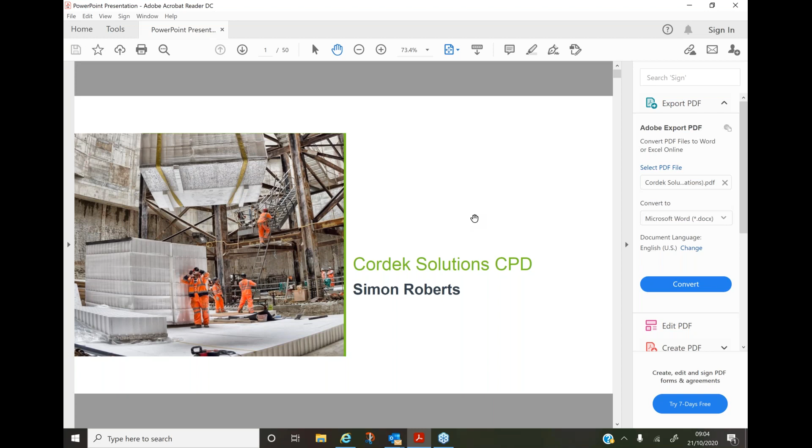Good morning, everybody, and welcome to the Cordek Solutions CPD. Thank you very much indeed, Jordan, for the introduction there. Okay, so today we're going to be looking at ground heave solutions, ground gas protection, and structural fill solutions. The CPD is really an overview of those three main areas that Cordek work with.

So Cordek as a manufacturer are predominantly involved in the construction industry. However, we do cover the sectors of leisure, marine, automotive, rail, highways and landscaping. And indeed, in any one of those sectors, you may come across the need to introduce a polystyrene product to form a solution or some gas protection measures.

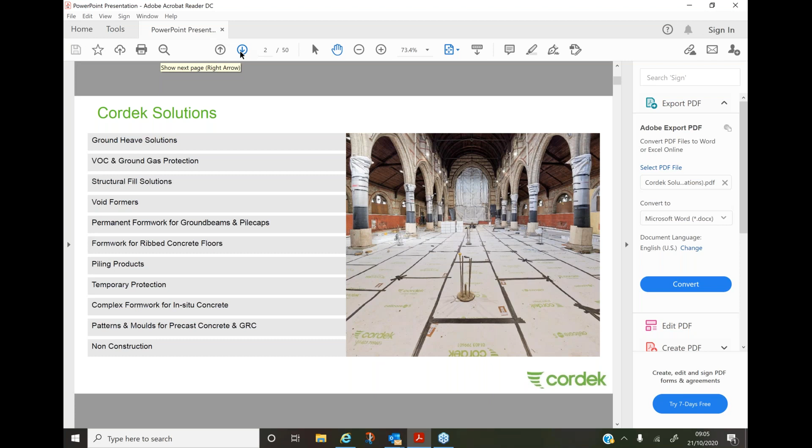That situation will also cause compression of surfaces underneath the footprint of the building, and heave can occur from three main areas, either as a result of a potential volume change from an expansive clay soil, or from reconstituted slag, which is a byproduct of the mining industry, or the freeze cycle. And the freeze cycle really is where we're looking at areas of permanently frozen strata that may thaw or freeze, and it's that thawing and freezing cycle that is replicating what a clay soil does when it expands under heave.

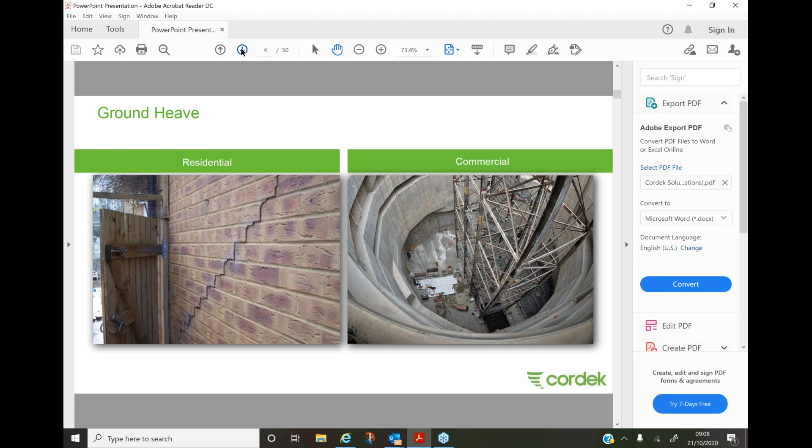Incorrect foundation depth can be remedied by consulting chapter 4.2, building in expansive clay soils, and selecting the correct foundation depth for your application.

Lack of heave protection is where you people very kindly specify our products, and the contractor or the project then deems that they don't want to actually put those products into the build.

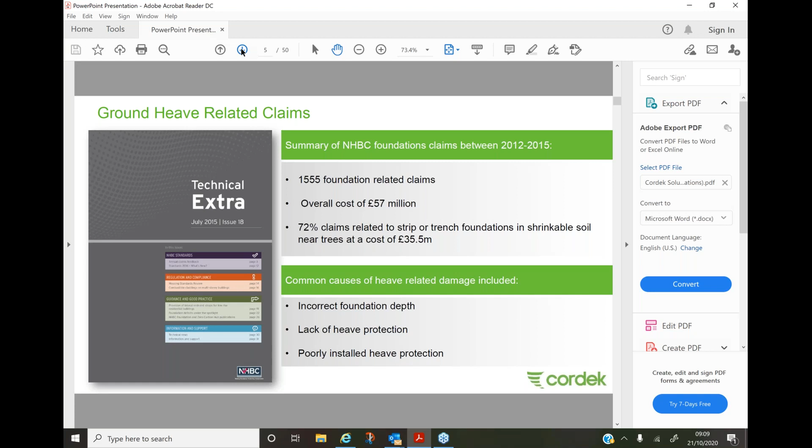Poorly installed heave protection is more where we can assist as a manufacturer, advising contractors, engineers and architects on the best method to install heave protection. That covers things like introducing a blinding layer or taping joints at formwork to stop the ingress of concrete slurry weeping down into the area where we're looking to procure a void.

So how do we know if we've got heave? Obviously we would undertake site investigation. That can be done by either a specialist geotechnical site investigation company, which may be a standalone company, or for some of the larger structural consultancies, an in-house operation, one of the services provided by those people.

We go to site and identify the soil strata, physically what is there, the characteristics of that soil, how it's likely to behave, and from that we get the plasticity index. We can also identify the heave potential, putting it into a low, medium, high, or extra high potential volume change.

It is the plasticity index that we consider when we are looking to specify the depth of a compressible polystyrene void former.

The other way of finding out if we've got heave, if we don't want a specialist geotechnical site investigation undertaken, we can refer to historical information. That can be provided either by the NHBC or the local building control, or simply by consulting the geology map of the UK and understanding where expansive clay soils occur.

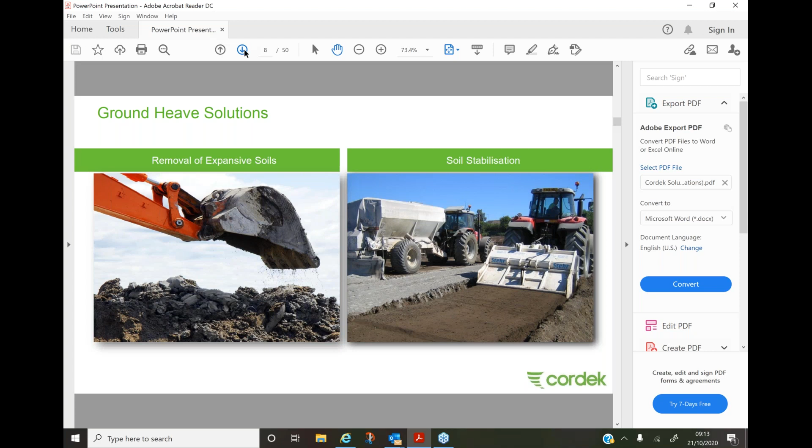We do, however, have to consider heave protection at the perimeter for any potential volume change higher than a low situation. So for a medium, high, or extra high situation, we would have to introduce lateral heave protection around the perimeter on the inside face of that particular perimeter foundation.

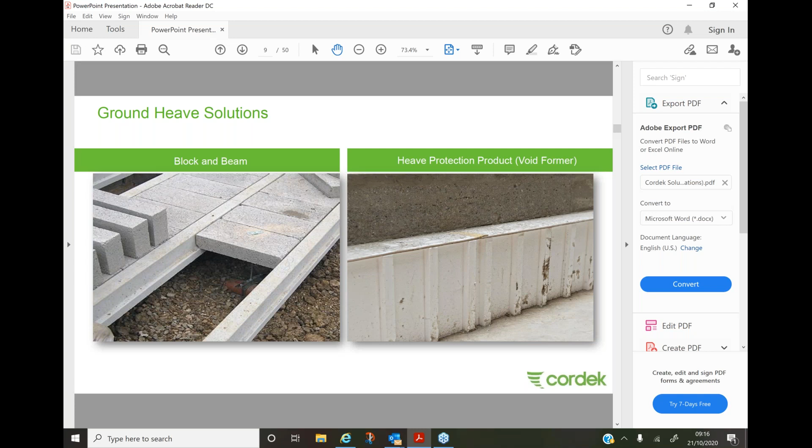So moving on to the actual Cordek solution, we have a range of products called Cellcore HX. These are a 4th generation product, 25 years in development, and they have full BBA certification. The Cellcore HX range is an umbrella term that covers 3 products within that range. We have HXS for slabs, we have HX Plus for providing heave protection and insulation under slabs, and we have HXB for beams and pile caps.

The product range itself will take you up to 900 millimeters head of concrete. That's physically how much concrete you can put on top of the actual product. If you want to protect concrete depths from 900 up to just under 2 meters head of concrete, then we would look at a different range, which is our Cellcore HG range.

Now the Cellcore HX range, the components of it are all pretty much the same. So you have a molded cellular leg with a range of different tops glued on top of those molded cellular legs. There are also drainage holes in the legs, which enables the product to be used in areas either where you have a high water table or in a coastal environment.

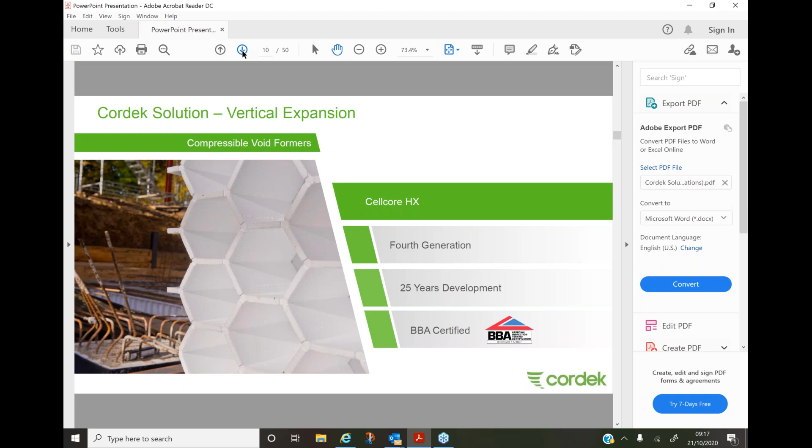So this one we can see here is our HXS product. It's a standard product for use under reinforced floor slabs. It comes in a 1.2 by 2.4 meter panel size and is made up of a collection of cellular legs, with a 10mm twin fluted polypropylene top, which is strong enough to actually walk on during placement of base spacers and reinforcement.

You can see there that the actual product is sited on a blinding layer. We do like to see the product sited on a blinding layer for various reasons. First of all, we want to start off with a flat level surface to minimize wastage of concrete pour above. Secondly, we like to alleviate the product coming into contact with large aggregate on the strata's surface, so hence the blinding layer, and compacted blinding as well, because we don't want the blinding layer to actually go up into the cells of the product and detract from its performance during heave.

So basically, we would introduce a 50mm blinding layer. You've got various options available. You can either have concrete, lean mix concrete, a sharp sand and cement dusting to form a crust. If it's an internal application, sharp sand. You can also use 10mm pea shingle.

However, building sand isn't suitable. Building sand is great when it's wet, it's nice and compacted. However, when it dries out, it becomes fluffy and will actually fill up the legs of the cells underneath the product.

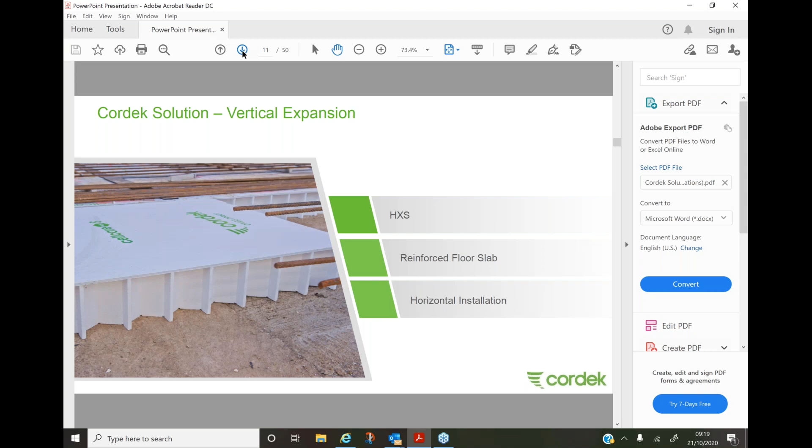So the HXS product is just a standard product. It provides no insulation value whatsoever for underneath the actual floor slab. If you are considering insulating your building, then you should consider looking at this product, which is Cellcore HX Plus.

So this is a combination product. It has a range of cellular legs with different depths of insulation glued onto the top of those cellular legs, dependent upon the target U value that you need to hit. And again, we have the protection board on top of it.

You can see that the operative in the picture is actually introducing formwork tape at the joints. That is to stop the ingress of concrete slurry weeping down between the panels and causing a dead spot. In this particular application, we had formwork tape, then the slab was poured, and then the damp-proof membrane was on top of the slab and underneath the screed.

Usually in most site applications, you'll find that you just roll out the DPM above those particular Cellcore panels and away you go. Either function will stop the ingress of concrete slurry weeping down in between the legs.

In terms of the U-value calculation service, we can offer you a U-value calculation service. It's a free of charge service, and we would ask certain questions.

So the area of the actual slab, the perimeter in linear meters, the target U-value that you would like your building or slab to achieve, the thickness of concrete poured on top, and the amount of potential heave. From that, we can specify a product for you. We put all of that into a U-value calculator, and it will outline the depth of insulation required to hit the target U-value.

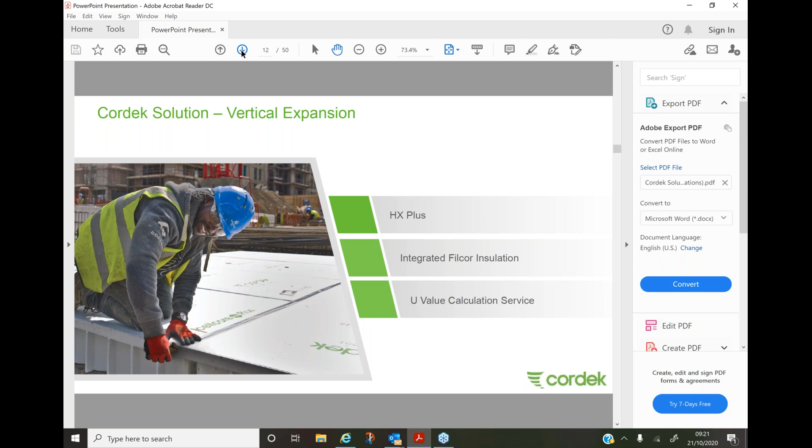The next product is a bit of a link here between what we are looking to introduce in terms of lateral heave protection, as well as our Cellcore product for protecting the beams and pile caps introduced on site. So what you see there is Cellcore HXB.

We manufacture that in a 2.4 meter length, and it's manufactured to beam width. That way we can ensure that the legs coincide with where the top of the formwork meets, and we don't experience any of the legs breaking off and the product overturning in the bottom of the trench.

It has a 5mm board on top of it rather than the 10mm board that I referred to earlier on for the HXS product. The reason for that is we're not actually anticipating anybody walking on the product during installation.

So the trench is excavated, we introduce our blinding layer, we then introduce our Cellcore, and on top of that we would then put our base spacers, side spacers, reinforcement cage, wire our formwork together, pour the concrete, backfill, and away we go.

HXB can be used for pile caps. What I would say though is if you have a close proximity of piles together, either 3 or 4 of these circular piles together, with a pile cap linking them all together, it might be considered quite a small space, and we might have site personnel trampling backwards and forwards over that small space, introducing quite onerous rebar.

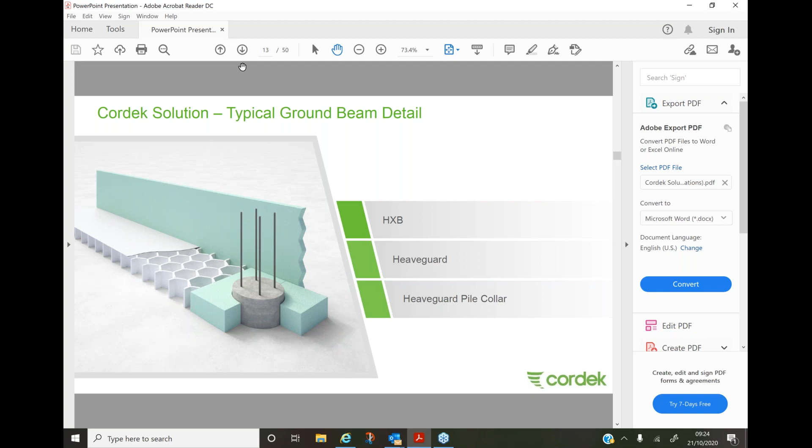As you can see, it's set up there. Obviously, there is no formwork. As I mentioned in one of the first slides, we do have a range of different formwork solutions that we can offer the contractor.

So what you see here is an example of our Cellform HX system. We have a U-shaped profile, an 8mm plastic formwork that is glued on top of our run of Cellcore, which is our HXB. Again, a 2.4 meter run, cut and manufactured to beam width.

So the idea behind this Cellform HX system is that it is a complete system.

It comes with straight line connectors, form braces, corner pieces, external corner pieces, infill panels, Heaveguard, and pile collars. So when your contractor has a set of drawings with accurate site dimensions, we can manufacture our Cellform system to fit those drawings. So when it goes to site, it's like a big boy's jigsaw - put it all together, put it in the trench, and there's no on-site fabrication required.

If your contractor doesn't want to choose this particular system, but would like to just introduce the Cellcore down below and perhaps use loose sheets at the side, we can also offer the actual formwork loose, sold in conjunction with formwork tape, just to take those joints down the side and stop the ingress of slurry weeping down into the area where we're looking to procure the void.

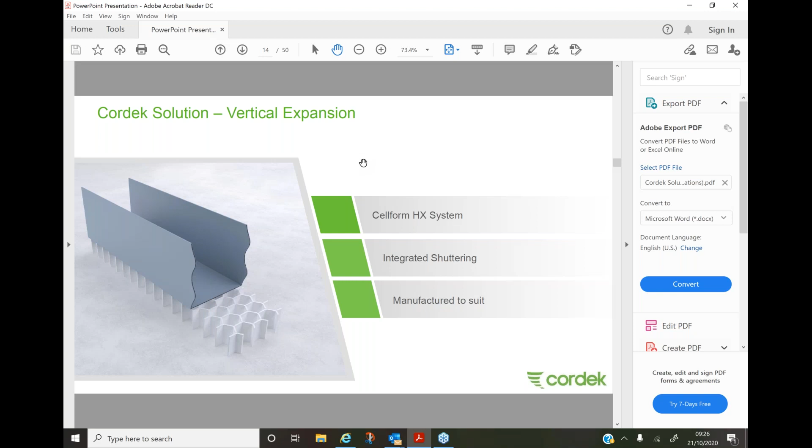So we predominantly have the plastic 8mm formwork. We also can offer the steel formwork, similar to the Pecafil type of product, which is our steel frame with polythene wrapped over the top of it. So there is a range of formwork available to you.

Just going to look at a little bit now on specifying the actual product itself. It is a very simple product to specify. We only really consider two things: the actual depth of product, in line with the amount of anticipated heave, and the grade of product, in line with how much concrete we're putting on top of it.

So if we think back to our site investigation, we've got our plasticity index there. We've also got the potential for the product to heave - low, medium or high. We can then see our void dimensions required here, and these are the various depths of products we would introduce underneath either our slabs or our beams.

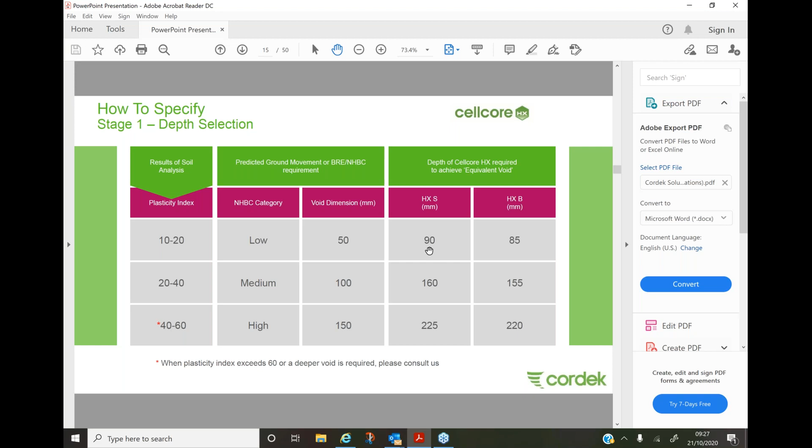So if you look at this one here for a low potential volume change, if you were putting it under a beam, we would have an 80mm leg with a 5mm top. Under a slab, an 80mm leg with a 10mm top.

In terms of selection of grades, it's all determined by the amount of concrete that we're anticipating putting on top of the actual product. So each grade has a color code, and those color codes are put on the product when it goes out to site, so the contractor is able to select and easily find which grade goes in which area.

So if he's got a slab that's up to 220 millimeters, he's going to put everything red underneath that slab. If his beams are up to, let's say, 450 millimeters, everything yellow is going to go under his beams. So it does make life a bit easier for him.

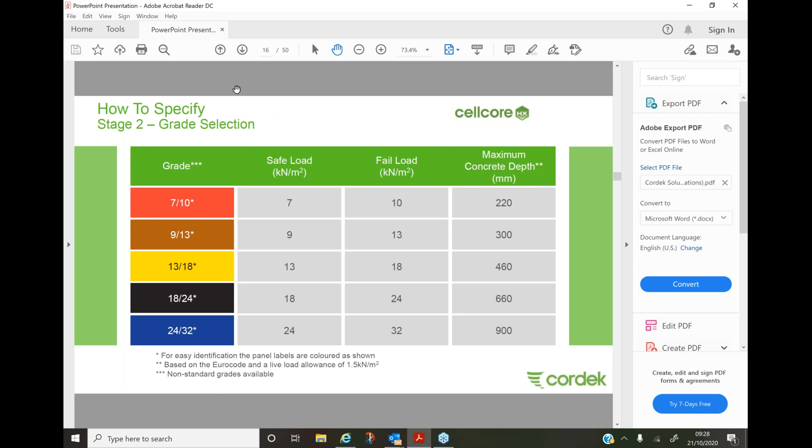Each product has a safe load and a failure load. So in the example of this one here, Cellcore 710 grade, it has a safe load of 7 kilonewtons per square meter - so it will support 7 kilonewtons per square meter. It's fully failed or compressed at 10 kilonewtons per square meter of upward force, and the maximum concrete depth is 220 millimeters.

As I'm moving through all of this, all of the facts and figures you're seeing in this presentation are actually outlined on the website. So if there's anything you're unsure about, go on there, select your product, select your data sheet - this information will be contained within those data sheets.

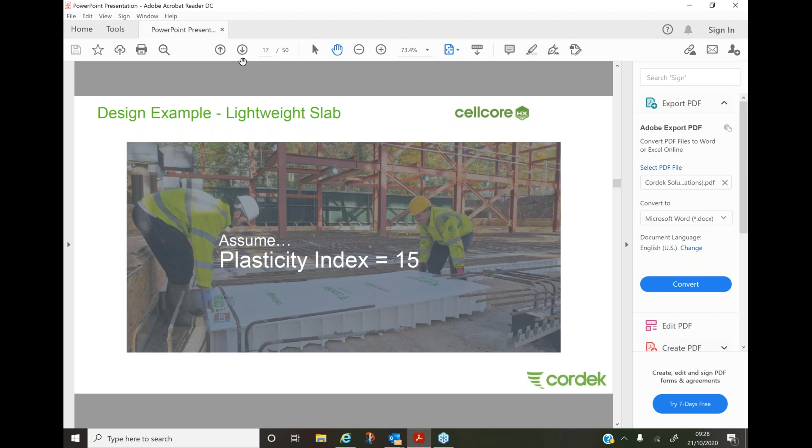So this is just a design example for a lightweight slab. Basically we've had our site investigation, we've identified that we've got a low potential volume soil, plasticity index of 15. So in our selector table, that's coming in there. You can see in between 10 and 20, we've got a 15 on the plasticity index, low potential volume change, 50 millimeter void required.

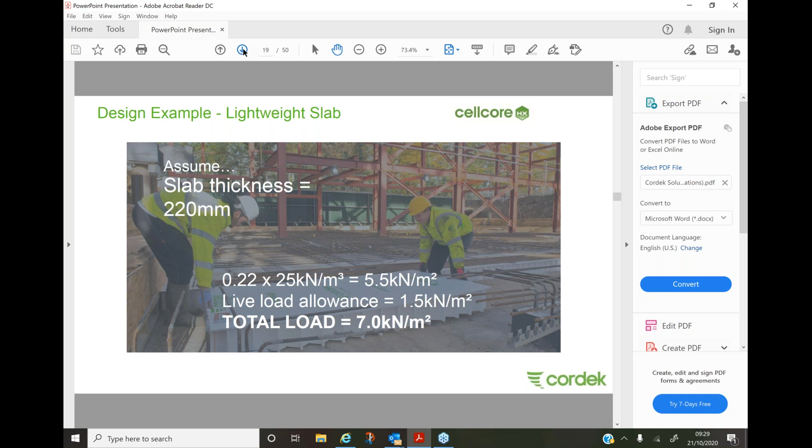So therefore, under the slab, 90 millimeter HXS for slabs. So we would do our little engineering calculation there to determine our total load that's going to be put on the product. So we've got that coming out at 7 kilonewtons per square meter, and that enables us then to actually select our particular grade.

So for up to 220 millimeters head of concrete, grade 710. So with everything, we have a full specification at the end of it. Cellcore tells us what the product is, 90 millimeter gives us the depth, so we know it's for a low potential volume change. HX gives us the range, S denotes it's for slabs, and 710 is the grade - so our safe working load of 7 kilonewtons per square meter, fully failed at 10 kilonewtons per square meter of upward force.

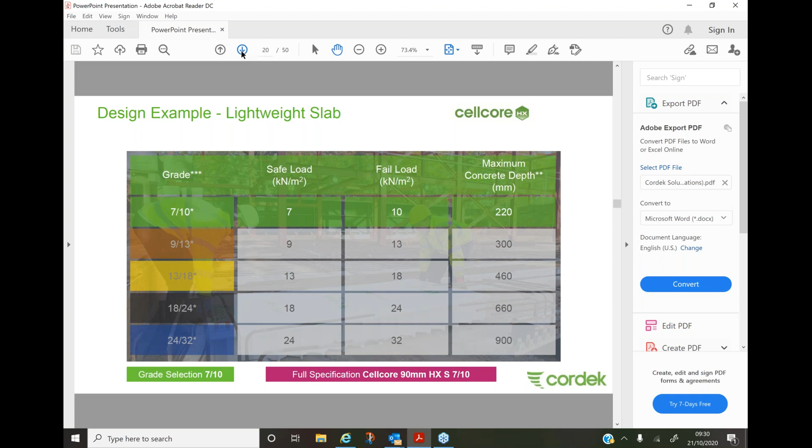That concludes the section on ground movement. We're now going to move on to VOC and ground gases.

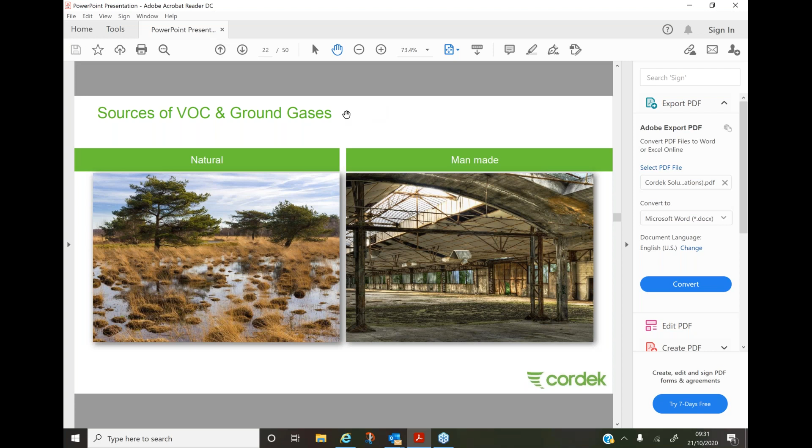So they are very real contaminants and gases that should be considered in a build, where we need to protect the occupants of that building from them ingressing into the habitable space within that building.

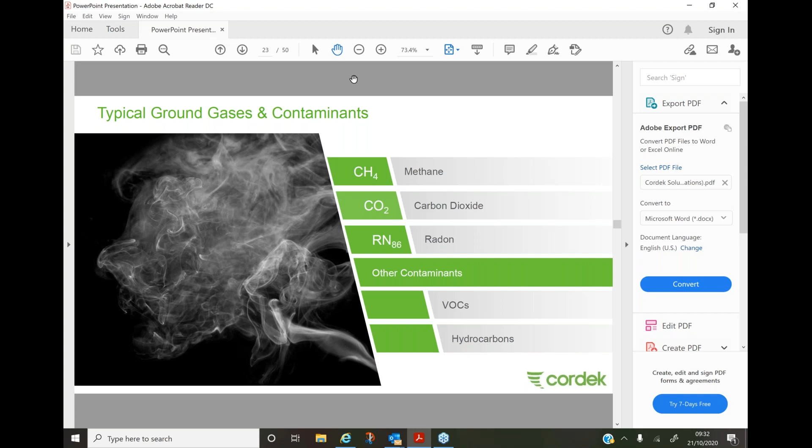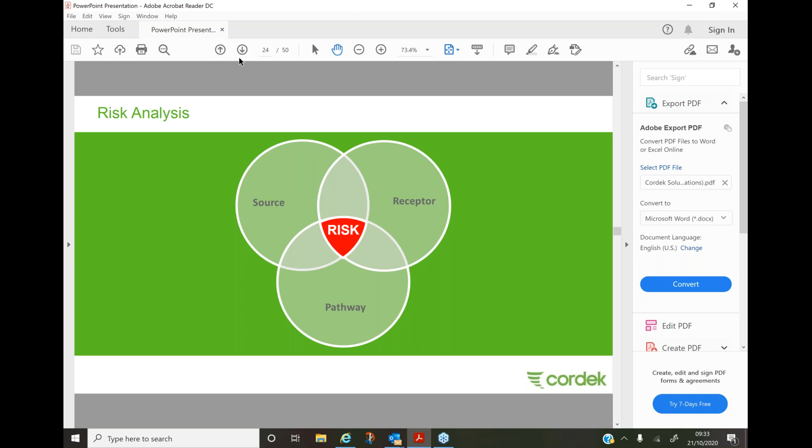If we think back to our expansive clay soil, we undertook a site investigation for that application, and similar things are undertaken for a contaminated land area. For example, we would go to site and introduce a range of boreholes, usually six over the area of the site, installed over a period of time designed to cover various different seasons and weather activity.

From that, we can establish what is physically there on that site, the concentration of what is there, and the flow rates in litres per hour coming out of the ground. From that, a gas screening value calculation is done, which puts the site into a level of severity - 1 being the least severe and 6 being the most severe.

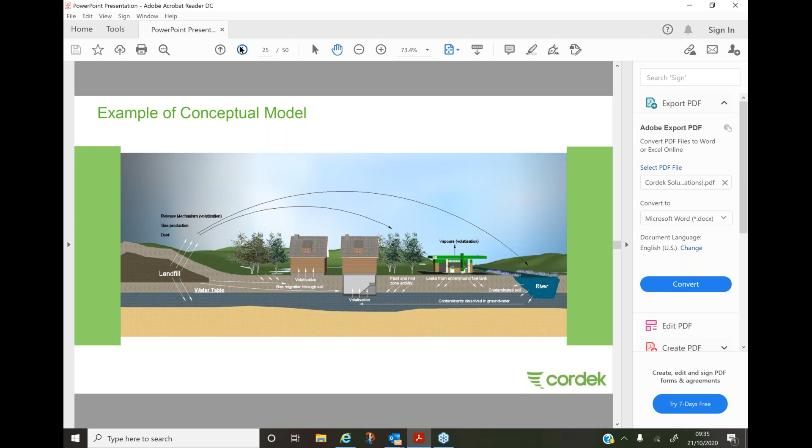That does have plus and minus points. You can certainly, if it's a residential application, be quite safe cutting your grass and growing flowers. You might not be so safe if you're actually going to grow produce in your back garden and then eat that produce, so it does have its limitations. It's usually to a depth of about 600 millimeters that is removed and then re-imported.

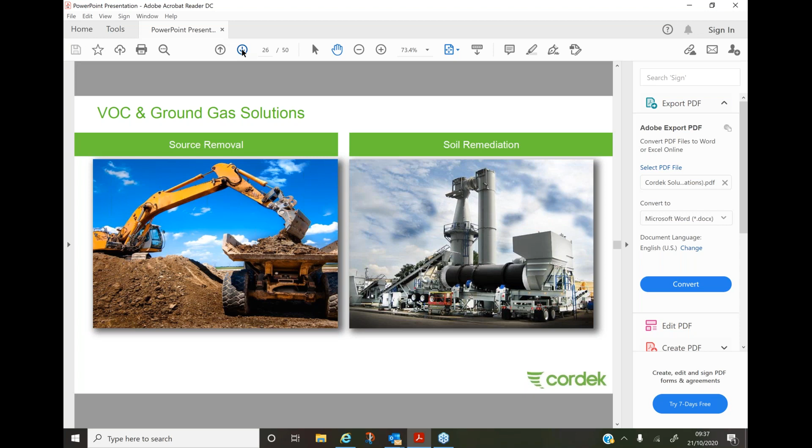In terms of the Olympic Park down at Stratford, when the Olympics were going on, all three methods that we see were used in that particular project - source removal, soil remediation, and also the pathway intervention method.

What we can see here is our Ventform system, and there are three main components to the system. If we look initially at the vent form panels, these panels are sited underneath the actual soffit of the slab, and underneath the panel there is a void that is maintained and kept open. The idea is that the contaminant migrates up through the strata below into this area underneath the slab, and is diluted and dispersed by tidal air out of the building, out to atmosphere.

What we're looking for in terms of guidance is one complete volume change of air every 24 hours underneath the footprint of the building, and where practicable we should be ventilating to atmosphere on all four sides. Where that isn't practicable, if we can just ventilate on the two longest sides and introduce a cross-flow situation. So those are the vent form panels, and we'll come on to have a look at those later on.

The second part of the system would be a membrane installed above the top of the vent form panels. In terms of guidance, the membrane should be a continuous impermeable layer extending over the entire footprint of the building, going across the cavity and terminating at the external leaf, where it can be trimmed and visually inspected.

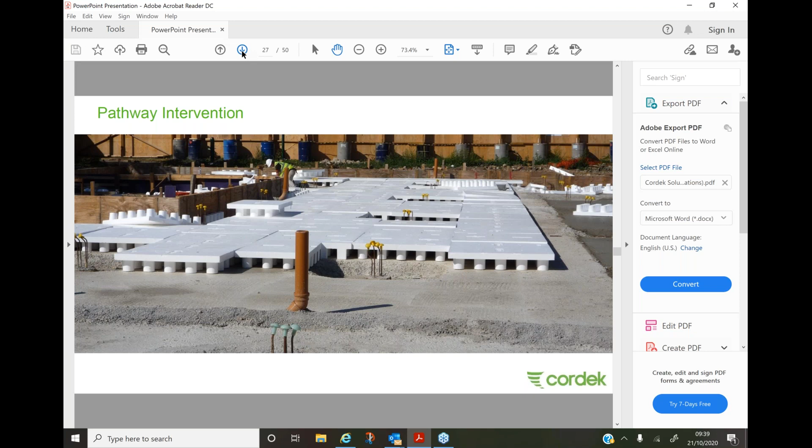There are industry guidance documents, supporting documents - they're all good bedtime reading. They're quite contaminant specific. Some of them are quite new and up to date and are being constantly changed. BRE report 211, for example, is a good one. The DOE Partners in Technology Guide is quite an old one.

It considers ventilating mediums for under a slab, using a metre wide strip. That's how the information was gathered for that particular criteria in ventilating under the slab, whereas what we're doing now is actually ventilating underneath the entire footprint of the building - a complete slab ventilation. So good bedtime reading, good documents, some of them not quite up to date.

The main two documents that people refer to are either the NHBC report or BS 8485, Code of Practice for the design protection measures for methane and carbon dioxide ground gases for new buildings. So those are the main two.

The NHBC document works on a traffic light system. Green means no guidance, no protection required. Amber 1 would be considered a low level risk, so the introduction of a membrane with a void underneath your slab. Amber 2, elevated level of risk, again void and membrane. Red - if you had a red zone, you should consider having your building actively ventilated rather than passively ventilated.

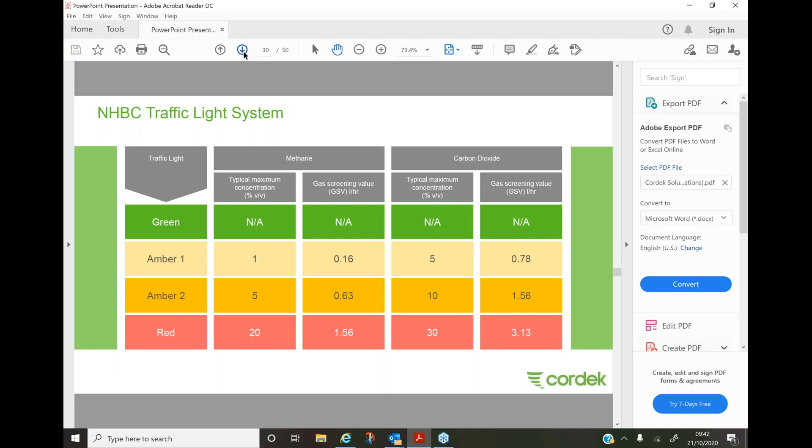For everything else, for all other types of building, there is BS 8485. That will cover all your types of buildings, from commercial, public, through to an individual house, for example. Those building types are split out from A to D. There is another presentation which goes into more depth than this one, which will outline the different types of buildings and what these letters from A to D actually mean.

Simplistically though, you remember our characteristic gas situation from 1 to 6, 1 being the least severe and 6 being the most severe. Each building type for each particular characteristic gas situation has to achieve a point score. So, for example, a building type B in a CS2 would need to achieve 3.5 points for it to be adequately signed off as protected.

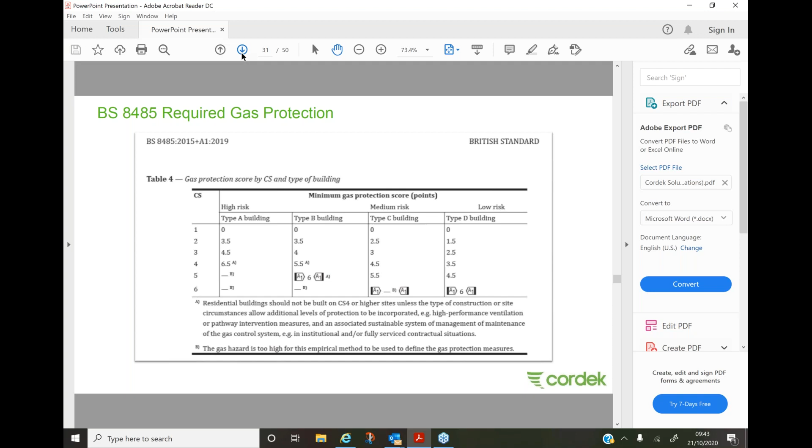So 3 main elements to this. First of all, there's the structural barrier, which will score you from 0 to 2.5 points, depending on how you build it. Then there is the ventilation protection measure underneath that structural barrier, scoring from 0.5 point to 4 points. Our vent form will give you 1.5 points and be deemed as good under the guidance, or 2 points and be deemed as very good. And then lastly, there is the introduction of the gas membrane or hydrocarbon barrier, scoring 2 points.

There has been a change from the 2007 edition of 8485. If you do have any old copies kicking about, it will tell you that your gas membrane or your hydrocarbon barrier will score from 0.5 point to 2 points. That has now gone over to 2 points. So all membranes, 2 points.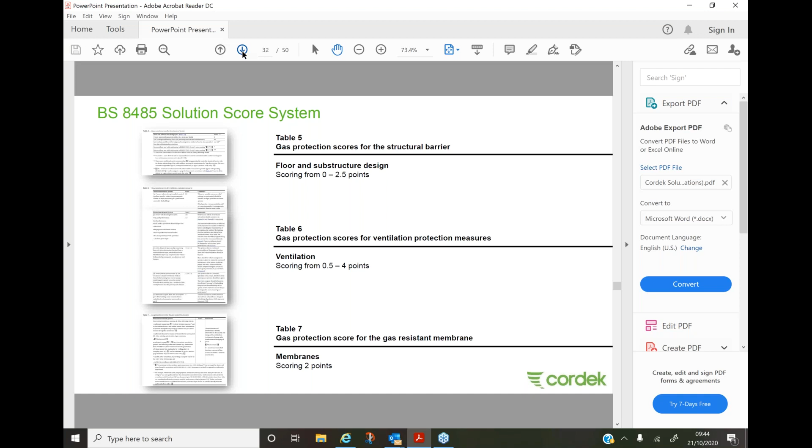The venting components themselves, we have 2 different types for passive gas ventilation. So we have a Ventform square-legged panel that can be either 80 mil or 100 mil in depth, and will take you from 20 kilonewtons to 50 kilonewtons load that the panel will take. It can be used for either a suspended slab or a ground bearing slab. The Ventform cylindrical legged panel on the right hand side there, that is 150 millimeters or 200 millimeters deep, and it will take 9 or 13 kilonewtons load, and it is for use with a suspended slab only. Both panels are molded panels, and they are 1.2 by 1.2 meters in size.

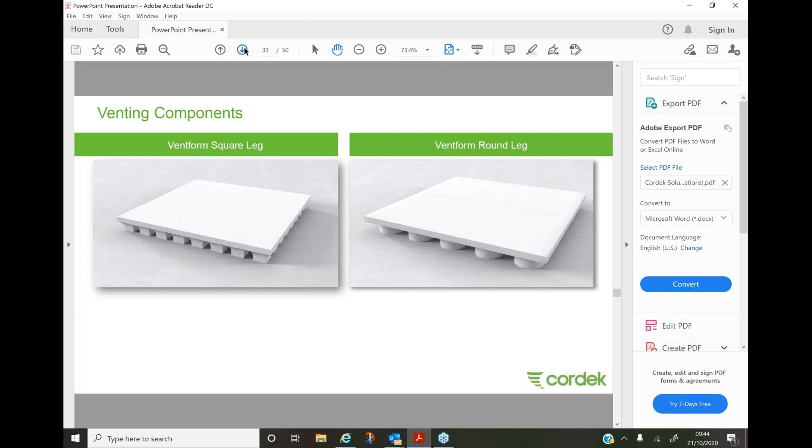If you wanted to ventilate and also guard against heave, we have this product here, which is called Cellvent HX. It's a combination product. It reverts back to the old model size of 1.2 by 2.4 meters. We have the collection of molded cellular legs at the bottom here, which replicates what our Cellcore product is doing in terms of protecting against heave. We then have a primary board on the top here with holes in it.

So that enables the contaminant to move up from the void below into this area here, which is our maintained void that is kept open, and that is replicating what vent form 8020 will do in terms of dilution and dispersal out to atmosphere. Then we have the top board, which is a 10 millimeter board, nice and strong for you to walk on when you're actually setting out. If you wanted a larger void here, if you had higher concentrations of gases and contaminants you wanted to get rid of, we can actually manufacture that.

The reason this product has come about is really changes in guidance. So if you have an area where you have an expansive clay soil and gas, and you are looking to actually protect your building, the Cellcore product under heave will compress, and you will have a void that is formed full of spalled material and compressed polystyrene legs. In other areas where heave hasn't occurred, the legs remain upright, and the drainage holes, which are sited at the top of these legs here, provide your cross-flow ventilation. In that scenario, it is simply not enough just to have this layer here. We have to have this maintained open void above it, and hence we've developed this Cellvent HX product.

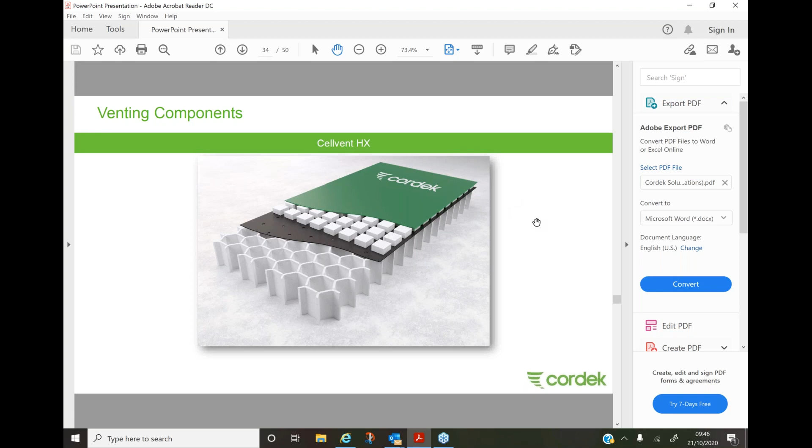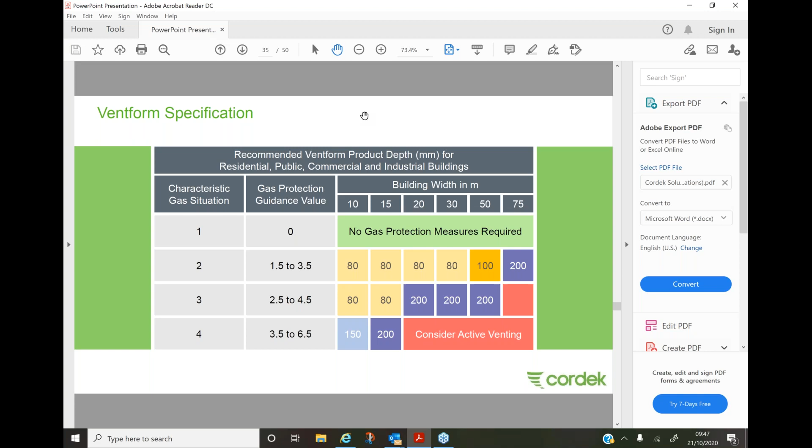That gives you an idea of the characteristic gas situations from 1 to 4 and how applicable our Ventform system would be to those particular CS situations. Obviously, it has its limitations. If you have a CS4 and you have a building which is 15 meters long on its longest side, that really is your limit for introducing vent form as a passive gas ventilation system underneath the footprint of that slab. Anything larger than that, really you should consider actively ventilating that particular footprint of building. But you can see there your characteristic situation, gas protection guidance value, and the depth of product that we would actually introduce there.

For ventilating to atmosphere, there are various different mediums. 9 times out of 10, if we have the conventional envelope setup, so blockwork inner, brickwork outer, we use air bricks with a periscope vent at 2 meter centers. If you can't get it in the wall, we can get it in the floor with either a rectangular or circular gully vent, or a rectangular ground gas vent box, either at 5 or 6 meter centers.

If you wanted to remotely ventilate away from the building, then we would use gas vent bollards at 8 meter centers. It gives you a nice raised up area away from the level of the strata to ventilate out to atmosphere, and you could also use that in areas where you have a high water table.

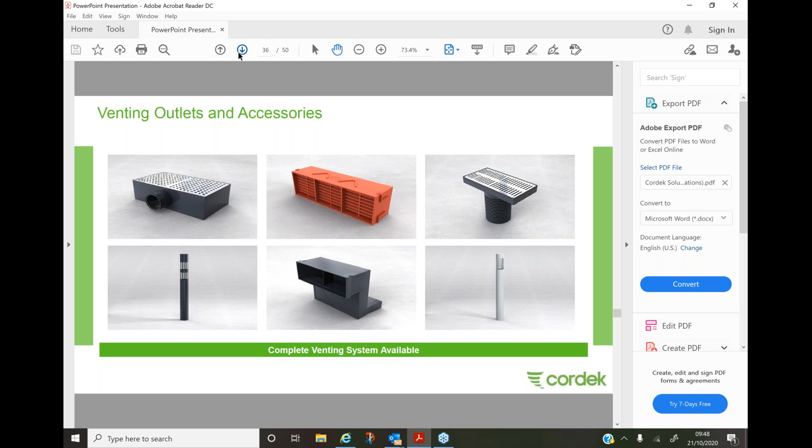Membrane specification. Simplistically, we have 2 types of membrane. We have a tri-gas membrane, which is suitable for methane, radon, and CO2. And we have a Puraflex membrane, which is a combination membrane in so much that it will take care of methane, radon, CO2, and a range of hydrocarbons. So it is a hydrocarbon and gas membrane combined.

Membranes come in various different variants, and those variants pertain to the different types of membrane that we have. For example, anything installed vertically is always installed in conjunction with a primer and will have an adhesive back to it. Anything installed horizontally will normally be loose laid, and the joints will be either taped or welded.

If you want to go across a cavity, or if you wanted to extend a membrane underneath a transecting wall sitting on top of where the membrane was going to be introduced, we also have a patterned variant. There are various detailing strips and various preformed top hat sections.

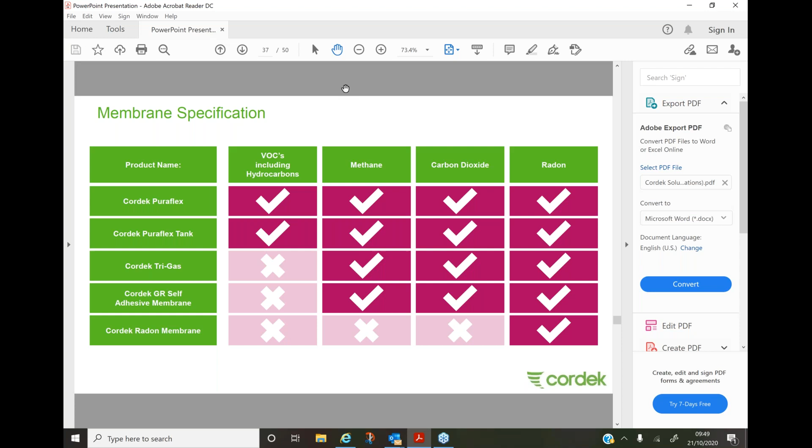In terms of Puraflex, this is our hydrocarbon barrier and gas membrane. We also have modeling software available to use on the website. In terms of specification, it aids the specifier in selecting the correct membrane for the job.

So for example, if you have a particular contaminant on site and you want to know whether Puraflex will guard against it, you can go onto our website, register your interest along with your details and the project and what the contaminant is. Put that information into the system and it will give you a result reading back as to the suitability of the membrane. So if you know you have mercury on site and want to know whether Puraflex will guard against it, you put that information in and it will tell you whether it will or won't. That enables you to make the choice of whether that membrane is correct to be specified for that particular application.

A lot of contractors over the years have tried using HDPE as a type of gas membrane. It's not a particularly great solution. Firstly, because you don't get batch continuity, it's a recycled product, so you don't know if what you're putting in at one end of your particular project is the same as what you're putting in at the other end.

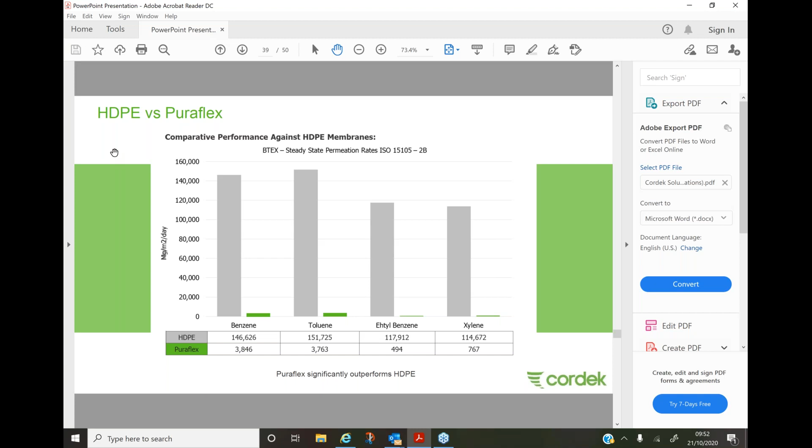That concludes our VOC and ground gases part of the presentation. We're now moving on to structural fill. As I mentioned before, all of these fact sheets and information are available on our website.

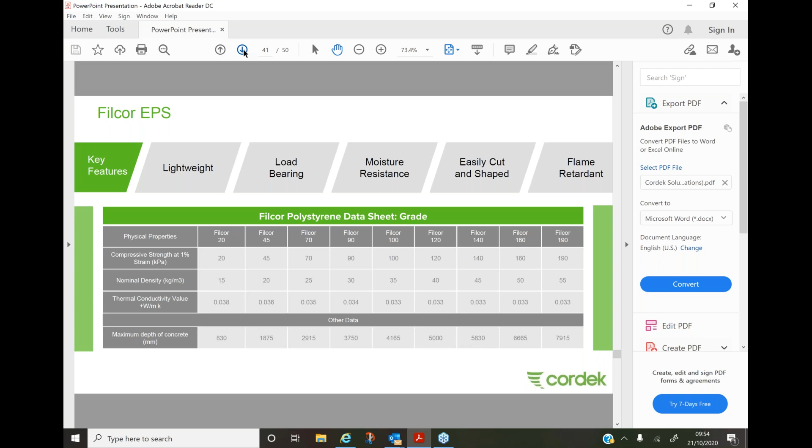In terms of polystyrene, the actual minimum sheet size is 25 mil thick. It comes in 1.2 by 2.4 on plan, and the block size is 1.2 by 1.2 by 2.4. If you need to go higher than 1.2, blocks can be easily adhered together. If you have an application like terracing, we can profile each of those areas to suit the terracing above.

So we always design in two different areas. We design firstly in the temporary state, where we consider how much concrete is going to be put on top of the polystyrene and how it is going to be sited - is it directly sitting on top of it, or is it spanning on top of the polystyrene? What are the loads imposed from there? We also consider the live load applications afterwards - what type of loads are likely to be transmitted down through this concrete area onto the polystyrene below.

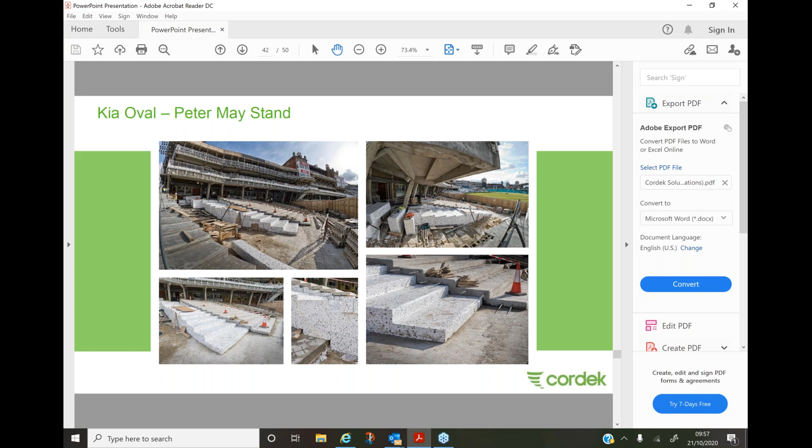We also had different grades selected for different areas of the station itself - underneath the track we used a higher grade than areas in between the track. The distance between the arches and the top level of the track here was between 3.5 and 4.5 meters, so quite a bit of polystyrene was introduced there. In other areas around the station concourse, underneath the stairs themselves, we used another lighter grade.

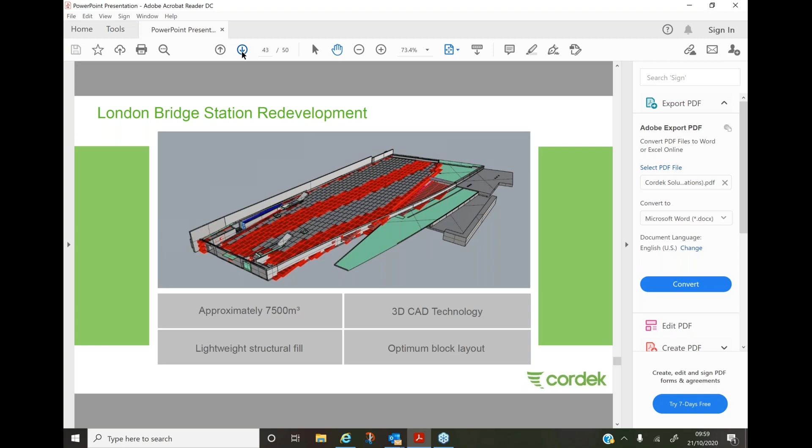Again, as it was a railway station, we may have historic use of hydrocarbons on site. That could be either from spills, historic spills from railway locomotives, heavy oil that's on site in the strata below, and also we wanted to guard against new spills from traffic above.

So indeed, when we put the polystyrene blocks on site, introduced those, you can see there we also used our Puriflex membrane to guard against any hydrocarbons and contaminants that might be there that are going to come into contact with the polystyrene.

Polystyrene will never be cheaper than conventional fill materials. The reason that people select polystyrene is for its intrinsic insulation values, the fact that it is very adept to profiling, shaping, routing, reduction in cycles of getting the material to site, so reduction in the environmental impact, and also on load saving towards load sensitive structures that may be underneath.

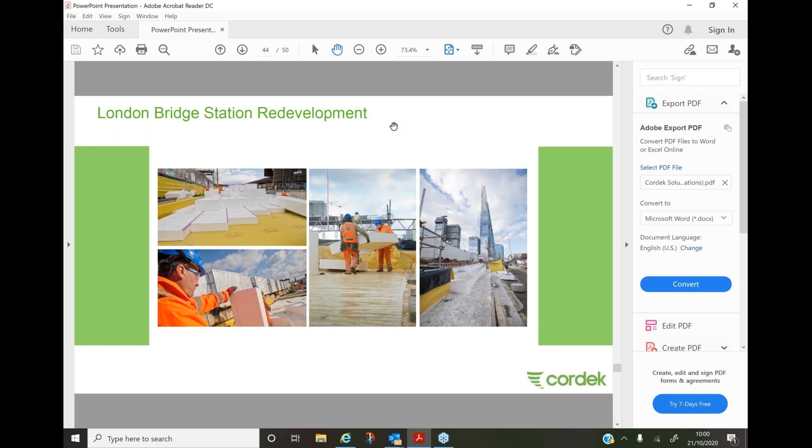If you are considering doing something out of the norm with polystyrene in terms of either shaping or routing, then this is where we come in with our project support service. So at Cordek, there are various different ways that we can actually take our block and sheet and produce it into the products that go out to site.

We can either use molding, we can use 3-axis or 5-axis hot wire cutting, or we can use 5-axis CNC controlled routing technology. So essentially, we will advise you with our construction engineering expertise in terms of what type of block you could consider, block size, block density, design guidance, perhaps do some compression calculations for you there.

And then we can agree on having a set of drawings that are issued, and from those drawings we can then build up our CAD/CAM package on that and produce a precision model from those drawings that can be then 5-axis CNC machine routed to go out to site.

So if you need to consider things like a waterproofing layer, various finishes, primers, gel coats, GRP layers, all of that can be put into the mix and given to your client, so we can provide a total solution to what might be perhaps quite a complex shape that they would need to have on site.